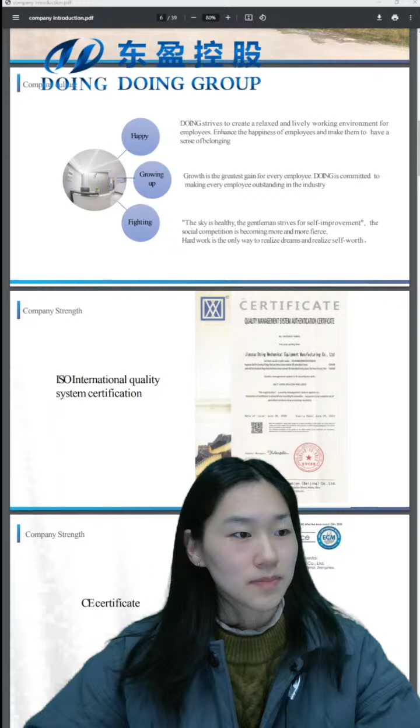Our company culture is happy, growing up, fighting. Happy means everyone is happy in Doing company. Growing up means our company hopes everyone can improve in this company, and everyone will improve their capacity. Fighting means we have a strong spirit and work hard to realize our dreams and self-worth.

Okay, there are our certificates to support our company. The first one is the ISO International Quality System Certification. You can see this is our company name, called Doing Mechanical Equipment Company. And this is the CE certificate. This certificate means our company meets the requirements of the EU.

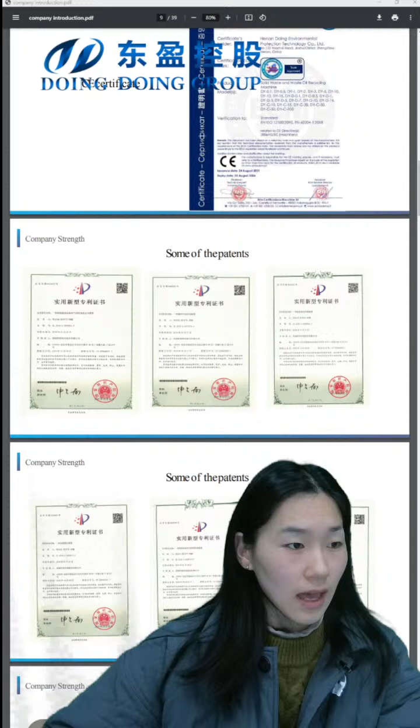And there are our patents. You can see this one is for the tire pyrolysis machine safety device, and this is for the oil gas cannot-backward device. This patent is for the discharging device, for carbon black discharging.

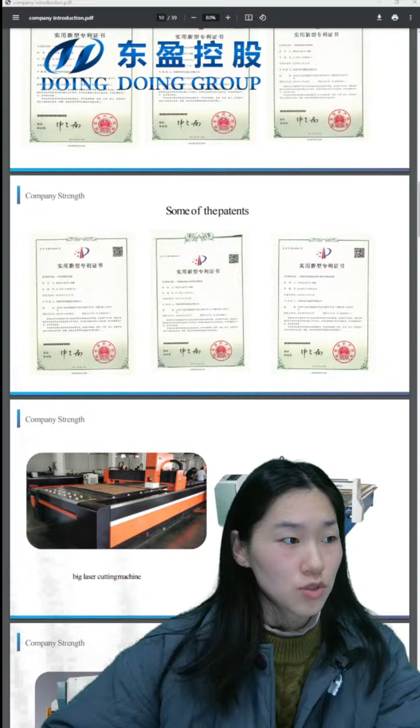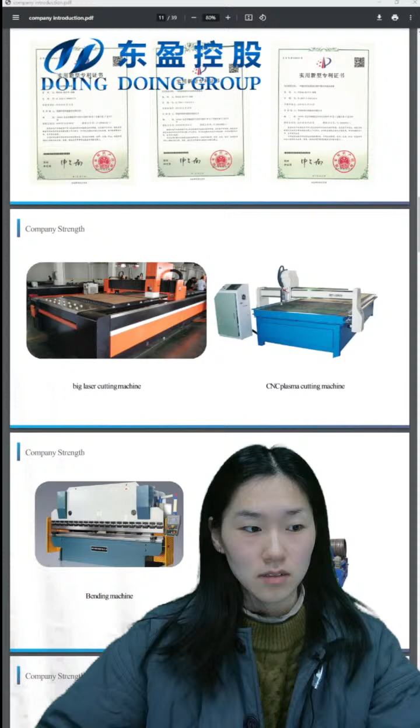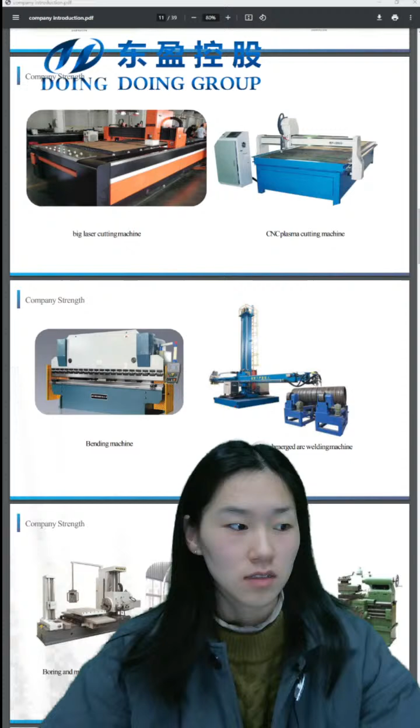There are our machineries. You can see this big laser cutting machine to cut the thinner steel plate, and this CNC plasma cutting machine to cut thicker steel plate. This bending machine bends the steel plate to make the whole reactor, the pyrolysis reactor. This is an automatic submerged arc welding machine to weld the reactor.

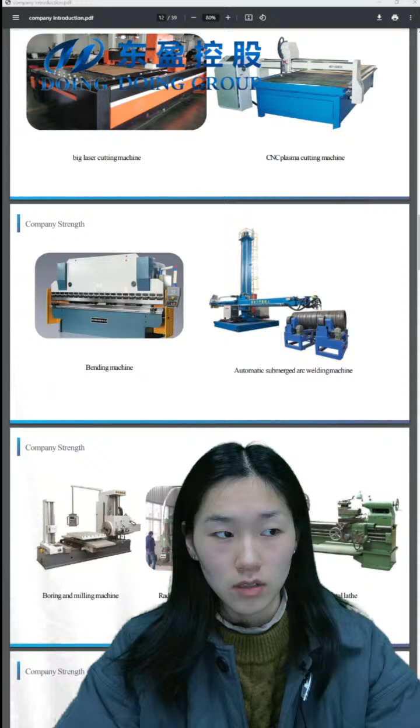Some suppliers make the reactor using workers manually, so their welding seams are not strong and easily corrode. So if you want to buy a pyrolysis machine to start this business, you can learn about the welding machine and the welding process from different suppliers.

This is a boring and milling machine, drilling machine, horizontal lathe, and the floor lathe, shaper, and rolling machine.

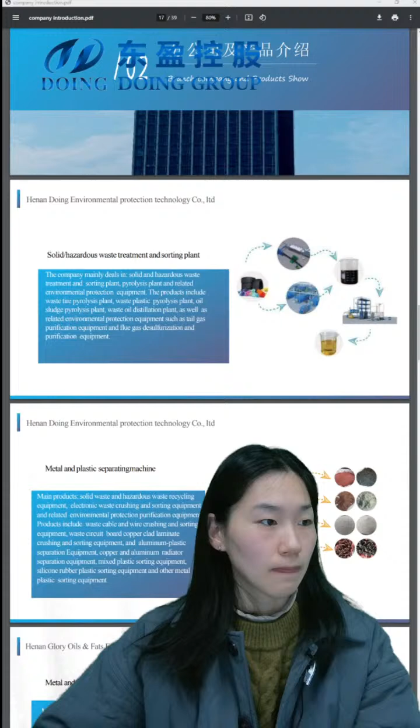This is our pyrolysis machine. You can use tire or plastic, feeding these raw materials into the pyrolysis machine and heating the reactor. The raw materials will be converted into oil gas, high temperature oil gas, and the oil gas will go through the condensers. We have 4 stages of condensers. Going through the condensers, the oil gas will be cooled down into liquid oil. You can see this liquid oil.

If your raw material is tire, the liquid oil will be more black. If your material is plastic, the color of the oil will be cleaner than tire oil. If you want to get diesel, you can choose a distillation machine to purify the pyrolysis oil into diesel. You know the price of diesel is more than pyrolysis oil.

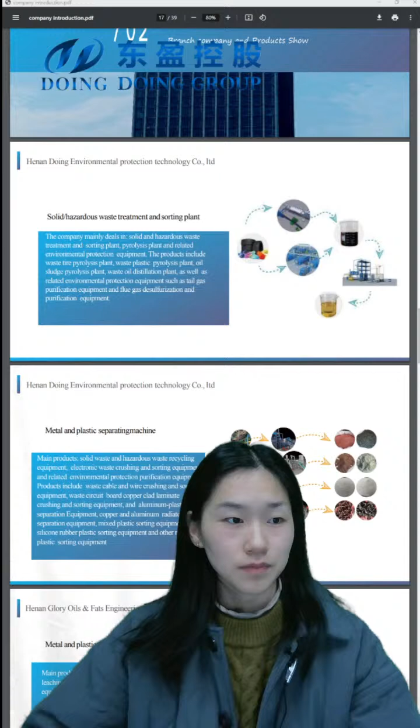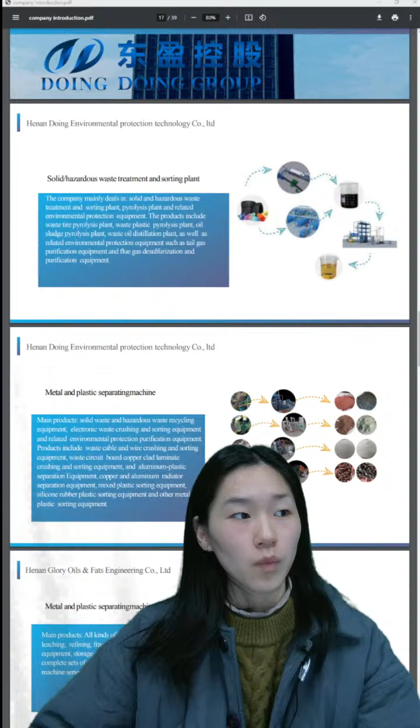This machine is called a solid waste treatment machine. And this is the other department, metal and plastic separating machine, just like with cable and electric wire. If you want to process this electric waste, you can choose this machine.

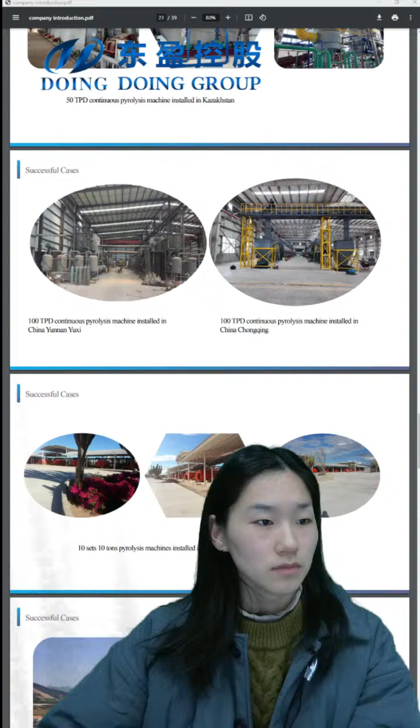This project is for a 100 TPD pyrolysis machine, installed in China, Yunnan, Yuxi. This is also continuous. Okay, we finished these parts.

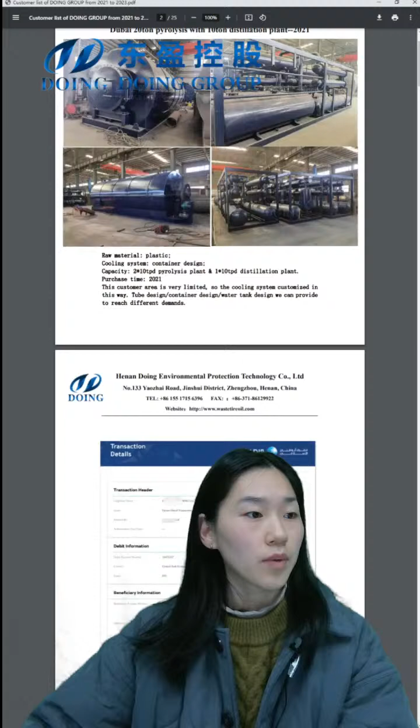Now I will introduce our project cases from 2021 to 2023.

This is the first case, from our Dubai customer. Their raw material is plastic. You can see the cooling system. They chose a container design. Container design means you can put this machine, the whole system, into a

40-foot high container. You can see this design is a frame. You can put this frame into the container directly, it's enough.

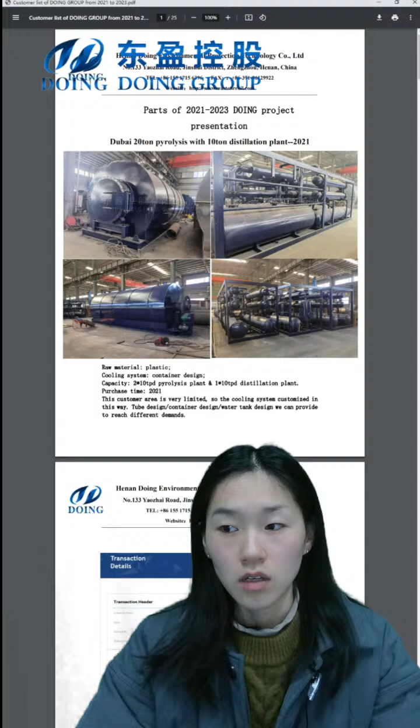The capacity is a 10 TPD pyrolysis machine. This machine is the batch type. Our batch type machines have many capacities, between 100 kg to 15 tons per day.

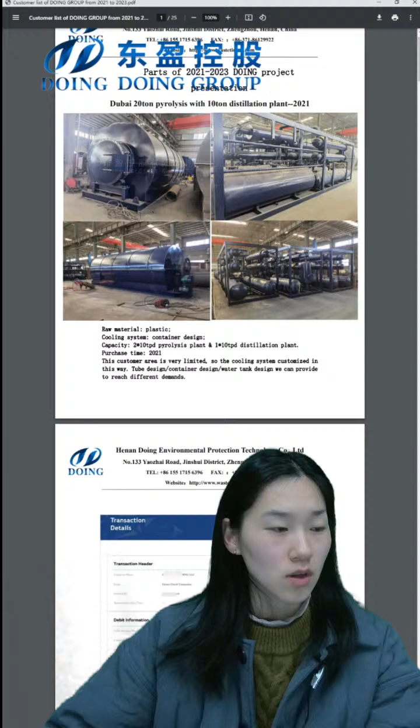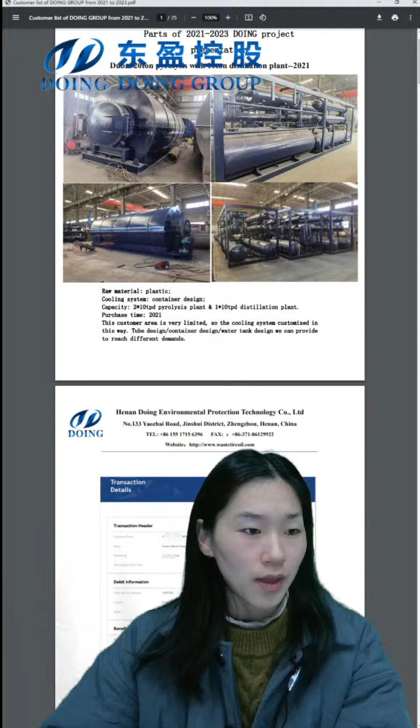The order was placed in 2021. This customer's area is very limited, so the cooling system was customized in this way, tube design, container design. It's very easy to install and operate. If you have any requirements, we can customize to reach different demands.

Okay, this is the transaction details. The customer's payment to us.

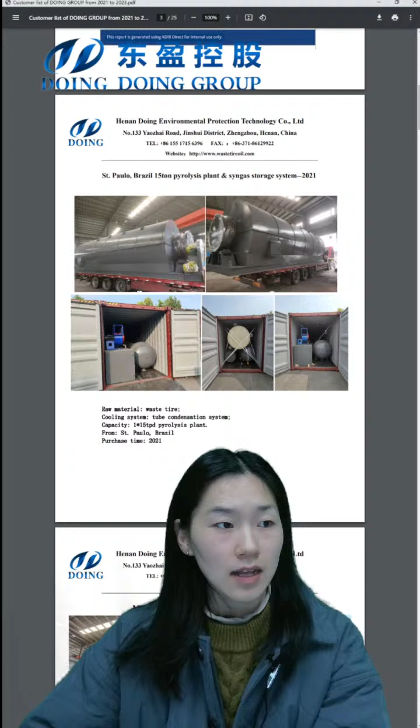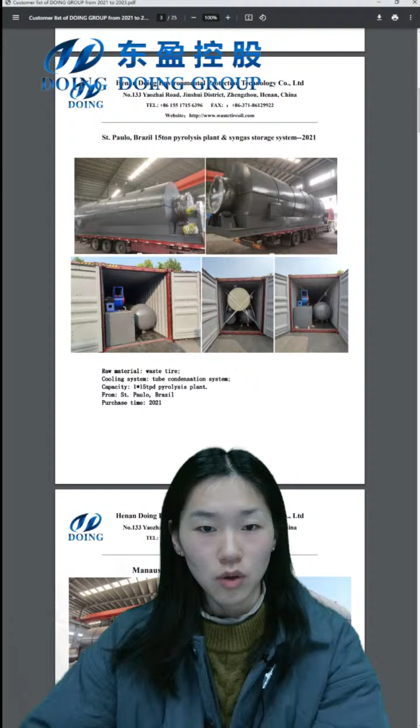These are delivery photos at that time. These photos are at the seaport. We loaded the machines into containers and took these photos just for checking the delivery details, to ensure no problems happened.

Okay, this case is also installed in Brazil, Manaus, in 2021. This customer's raw material is also waste tire. The customers who process waste tire are more numerous than the customers who process waste plastic, because the amount of waste tire is more than plastic.

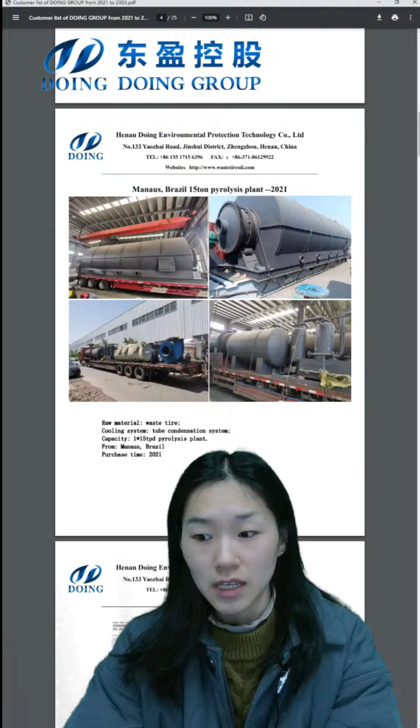The oil yield of waste tire is around 45% to 50%. But for waste plastic, we can't give a specific number, because there are so many types of plastic. If your raw material is PP, PE, PS plastics, the oil yield will be more. But PET and PVC are not suitable for pyrolysis, so try your best to reduce the content of PET and PVC.

You can see their cooling system is a tube condensation system. The tubular condensers are our new design. There is also a cooling design called a cooling water tank - it's an old design in the market. The water tank means there are so many tubes in one water tank, and the oil gas goes

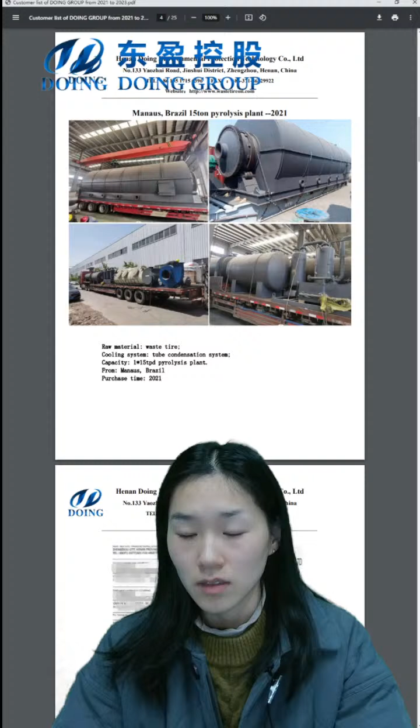through this water tank, so all the oil will be collected into one same oil tank - you will get one same quality oil. But with our tubular condensers, in the whole system we have 4 steps of cooling condensers. For these 4 steps of cooling condensers, we match 3 oil tanks to collect different qualities of oil. You can sell the different quality oils separately and get different profit. This is a bill of lading.

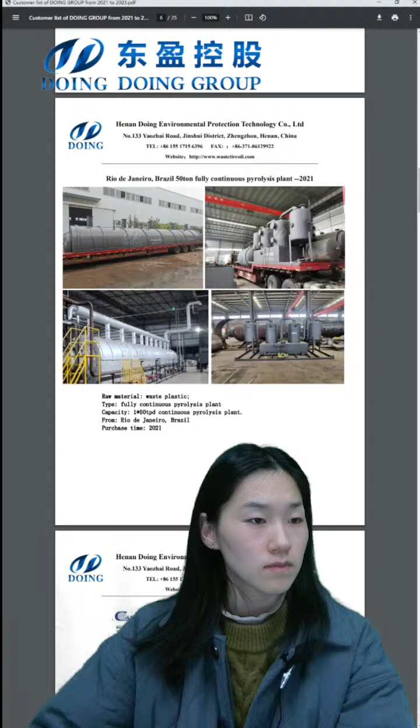You can see this project is also installed in Brazil, but it's not a batch type one - it's a 50 TPD fully continuous type.

This is an insulation cover to save energy and ensure the heat reaches the reactor fully. This is a smell removal system.

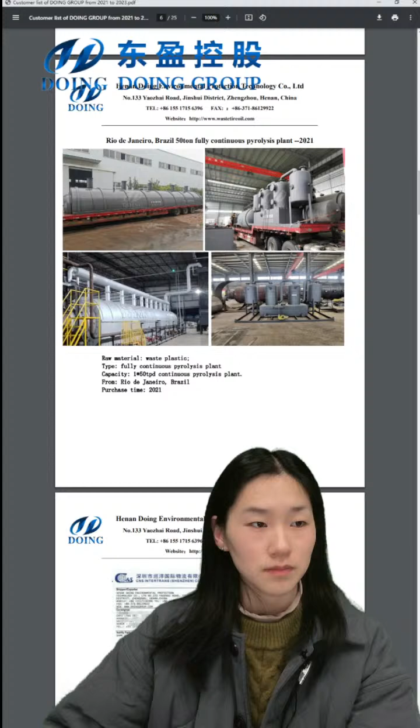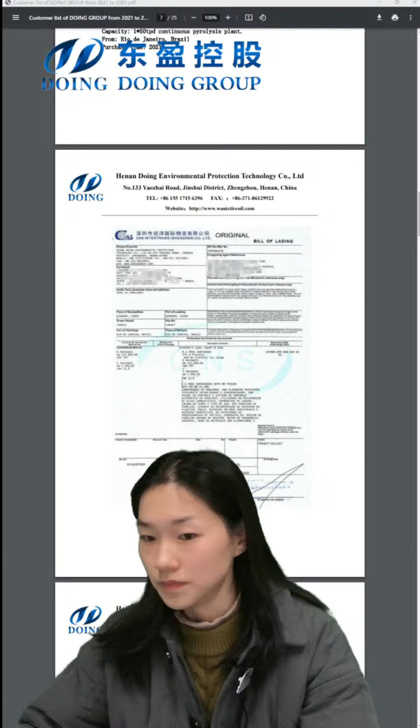This customer's raw material - okay, this is the original bill of lading for your reference.

For this customer, he bought a 100 kg minimum pyrolysis machine for testing their plastic raw materials, and after half a year, they bought a fully continuous, the biggest pyrolysis machine from us. It means using the smallest machine to test was a success. We have many customers who choose the smallest machine to test their raw material, to make a pyrolysis project successful before they start a big business.

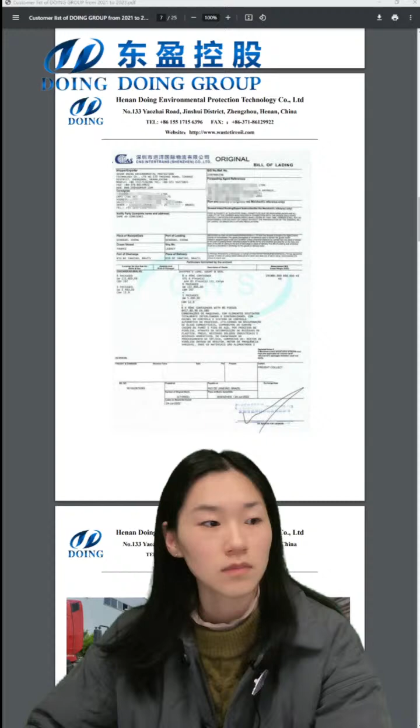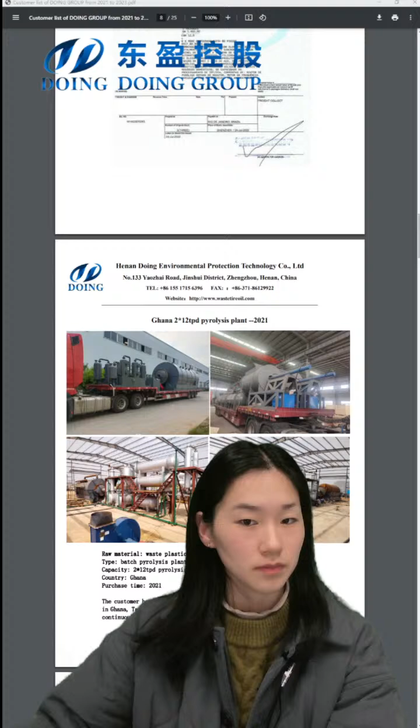Okay, this case's raw material is waste plastic and tire. The type is also batch type machine. In Africa, we suggest the batch type for customers here, not the continuous type, because in Africa the labor cost is not very high, so we don't need to save labor cost with a continuous machine. For batch type, you just need 1 to 4 workers per shift, and 2 to 3 shifts is enough.

And in Africa, the smoke environmental requirements are not very strict, so the batch type is enough.

There is a small story for this customer. This customer has purchased equipment from us 4 times, respectively in Ghana, Tanzania, Togo, and Senegal. There are plans to install a fully continuous pyrolysis plant around Dubai in the future, so I trust they will learn more about the fully continuous machine and discuss the technical details with us in the future. I hope the new project will be held successfully.

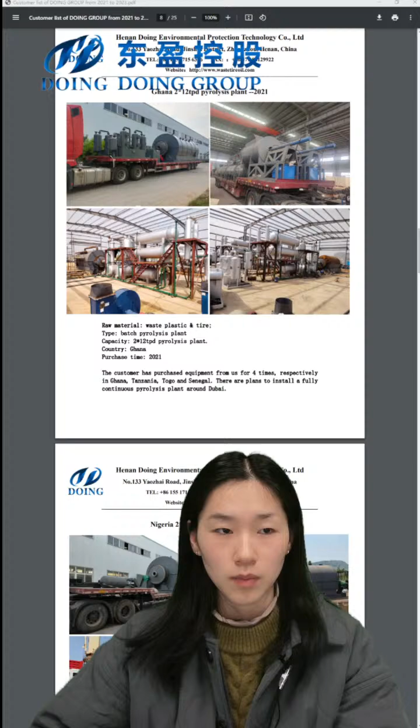Okay, this project in Nigeria, there are two units of 15 TPD pyrolysis plants in 2021. The raw material is waste tire, also batch type plant.

I want to show you, we have a branch office in Nigeria, and this branch office is specialized for cassava machine and potato starch machine. If you are in Nigeria, you can contact us and also can visit our branch office in Nigeria.

Yeah, so this picture is from installation at that time. They also use our new design, the tubular condensers. You can see these are our horizontal condensers. The horizontal condenser has the biggest cooling area to ensure the oil gas will be cooled down fully.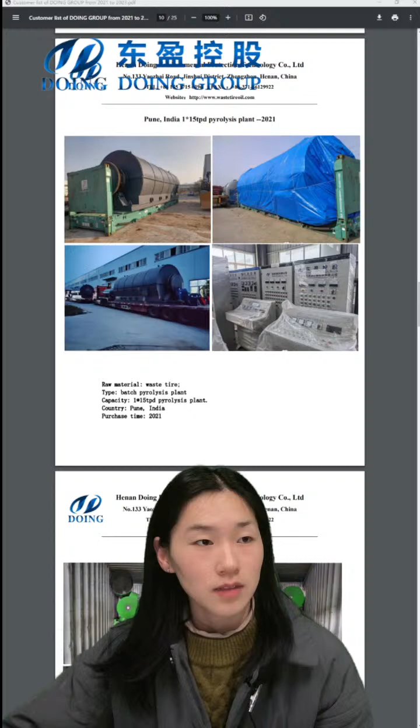This project is in India, Pune city. You can see this is a 15 TPD batch type machine in 2021. These photos were taken at the seaport at delivery time. This is the electric cabinet, our company logo.

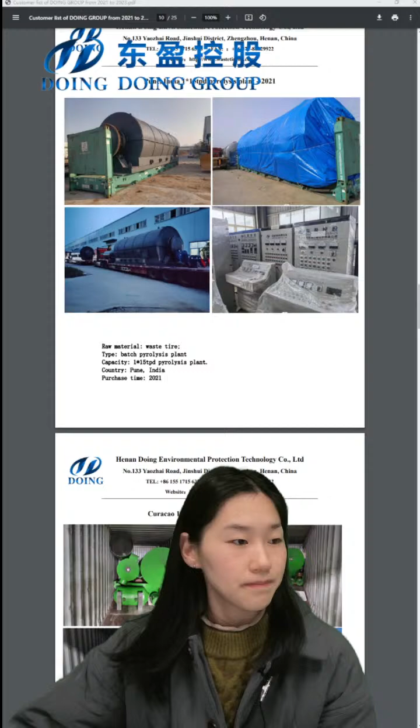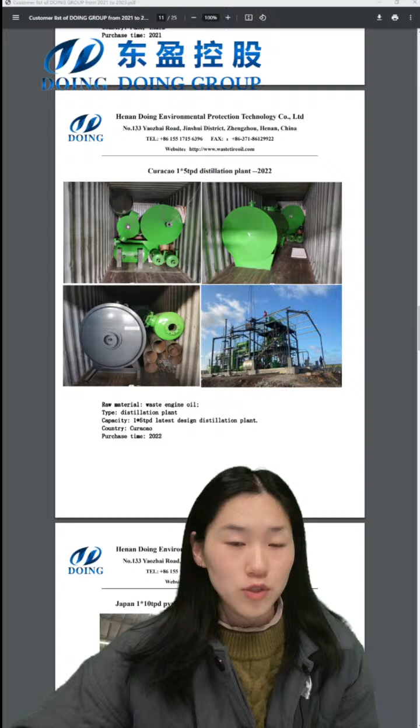This project was delivered in 2022. It's a 5 TPD distillation machine. The 5 TPD is not very large, but it's very popular in the new pyrolysis industry. If customers want to start this pyrolysis machine, but also want it to bring a good profit, they will choose a middle capacity like this one, 5 tons per day, to start this project.

This photo is for the installation at the customer's factory. This is the oil tank.

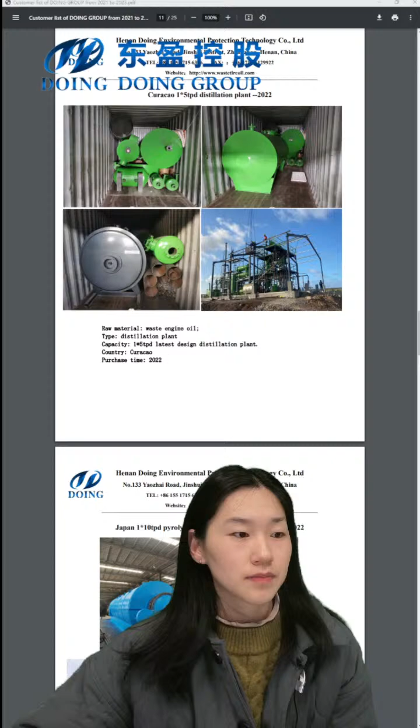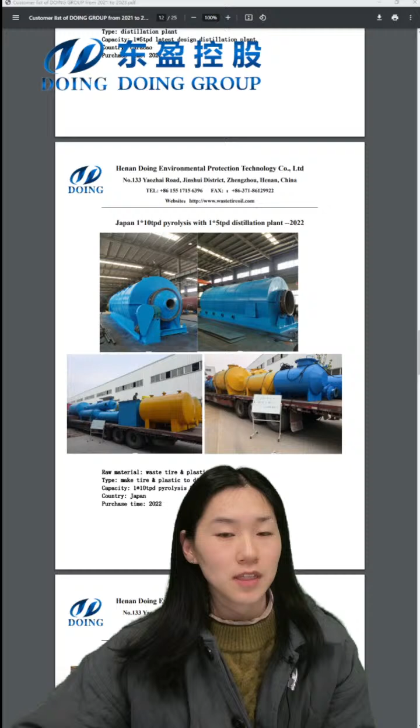This 10 TPD machine we sold to Japan. It's a 5 TPD distillation plant.

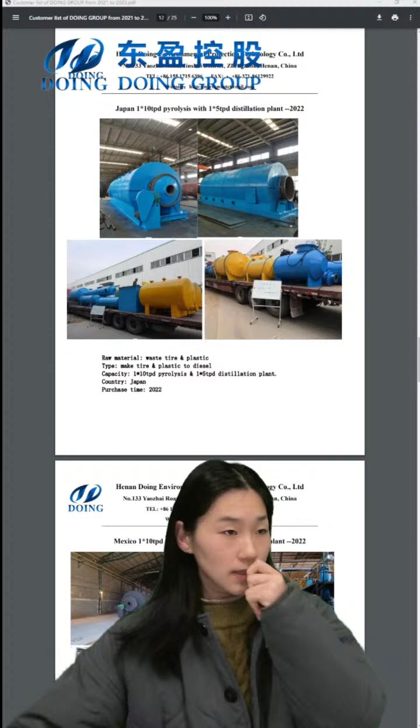You can see this reactor is for a 10 TPD machine, and there are the spare parts like condensers, oil tank, and our optional systems like a vacuum system and the rapid cooling system.

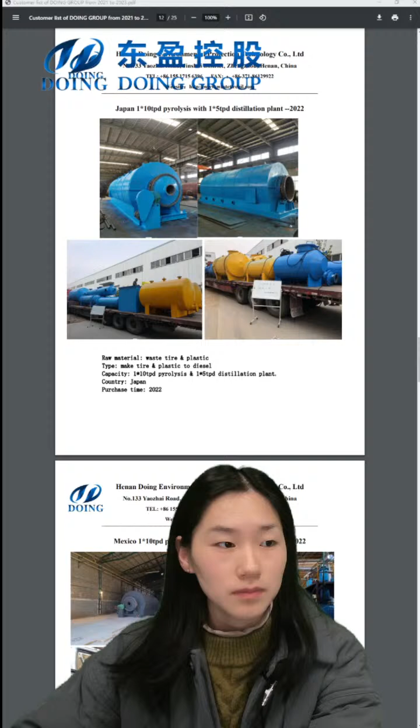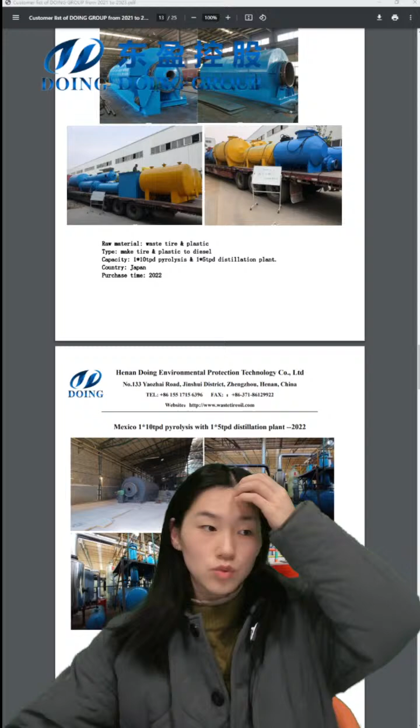This project was installed in 2022, also in Mexico. You know, Mexico is our main market all over the world. This case is a 10 TPD pyrolysis machine with a 5 TPD distillation machine.

This customer's raw materials are waste tire and waste plastic. Why do customers want to choose these two raw materials? Because the price of raw materials changes all the time. When the price of waste tire is not too high, the customer can buy the waste tire and process this low cost material to get a good profit. But when the cost of tire is very high, they can choose plastic.

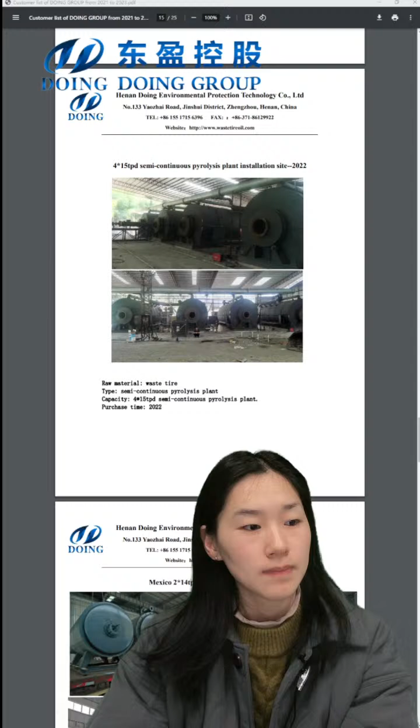This machine type is a semi-continuous pyrolysis machine. We sold 4 units of 15 TPD machines in 2022. Their raw material is also waste tire.

Before we had batch type and continuous machines, but nowadays we designed the semi-continuous type. For a semi-continuous machine, you don't need to open the discharging door to discharge carbon black.

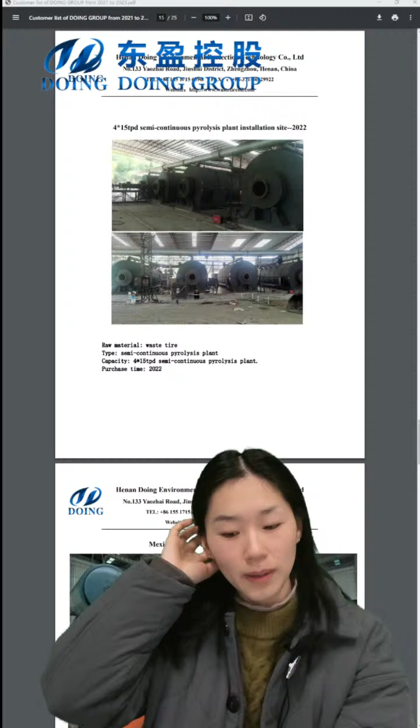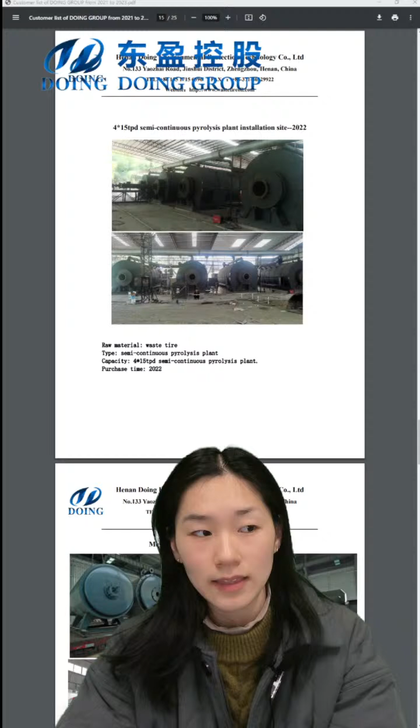For semi-continuous, you can improve production efficiency. You can finish 3 batches within 2 days, but for batch type, you can finish only 1 batch per day. So semi-continuous is more efficient than batch type, and cleaner, with higher efficiency.

This project is installed in Mexico. There are 2 14 TPD distillation machines. This customer's material is waste engine oil. The quality of waste engine oil is very high, so the quality of the final diesel is even better.

These tanks are the rapid heating system. It's an optional system to reduce the heating time.

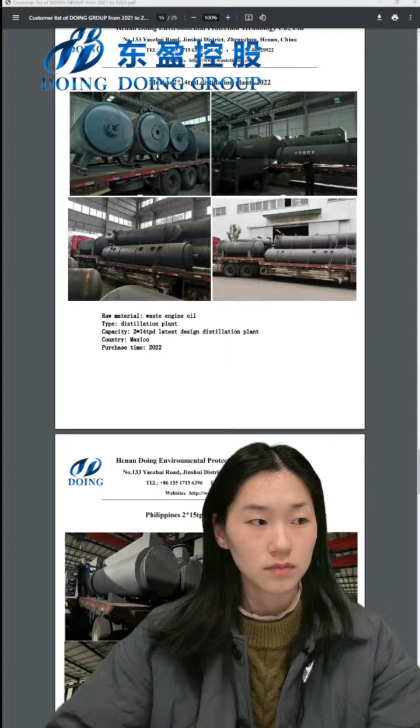This project is in the Philippines in 2023. This customer bought 2 units of 15 TPD pyrolysis machines. They use waste tire as raw material, and you can see they chose to use a cooling water tank to cool down the oil gas.

A water tank is a simple cooling device. It doesn't require very high skill from workers. If you don't have mature workers to operate your machine, you can consider this water tank design, and the cost of the water tank design is lower than our new tubular condensers.

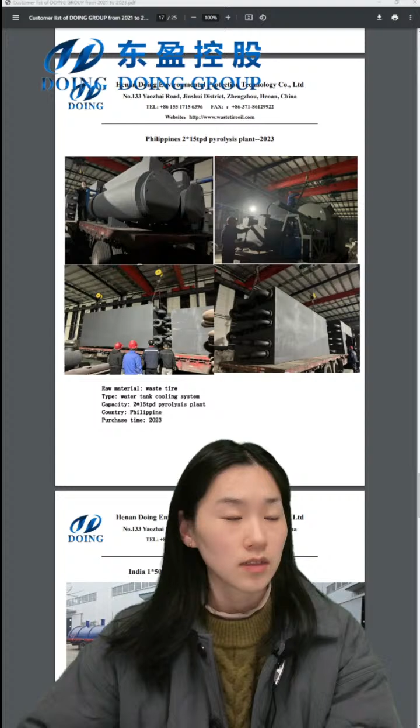Before we deliver the machine, they made the on-ground base to install the continuous reactor. For a continuous reactor, we need to ensure the stability of the whole system. So when making the ground base, you need to make a very strong base to ensure the stability of the whole system.

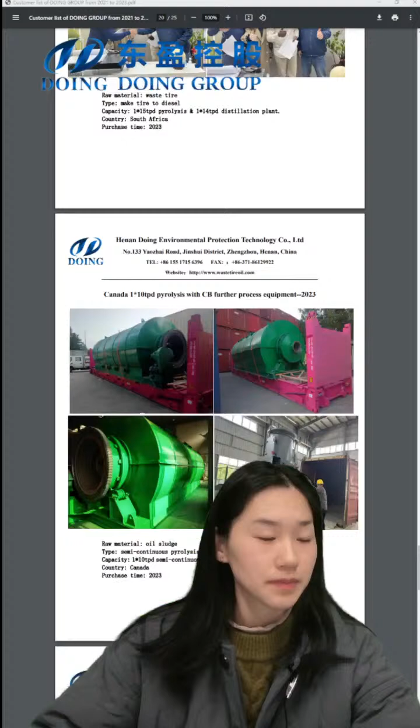Okay, this 10 TPD machine is for processing oil sludge. For oil sludge, a part of customers choose this material because, like normal customers, they usually collect tire and plastic easily, but for oil sludge you need to find a fixed origin. You need to find a specific seller of oil sludge. When you have this long time cooperation, the oil sludge will be a very good raw material.

And we have a customer who uses the waste oil from ships. They use our specialized oil sludge machine, and then they get good quality final oil.

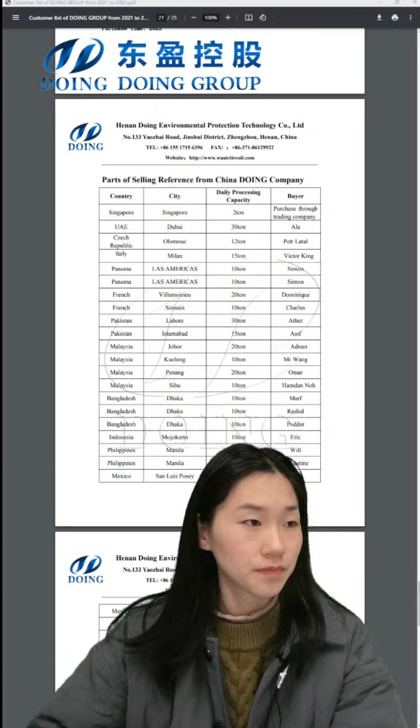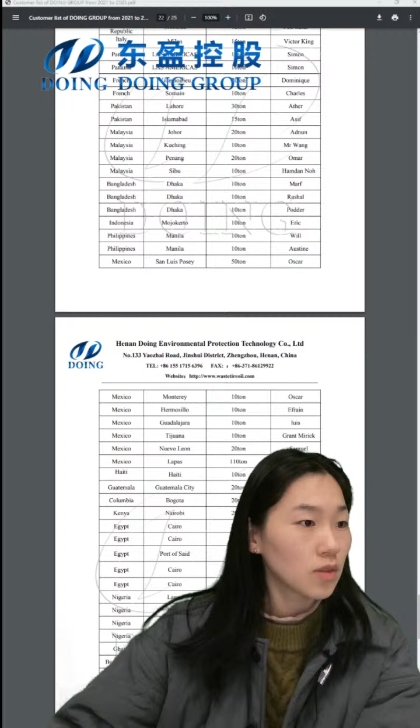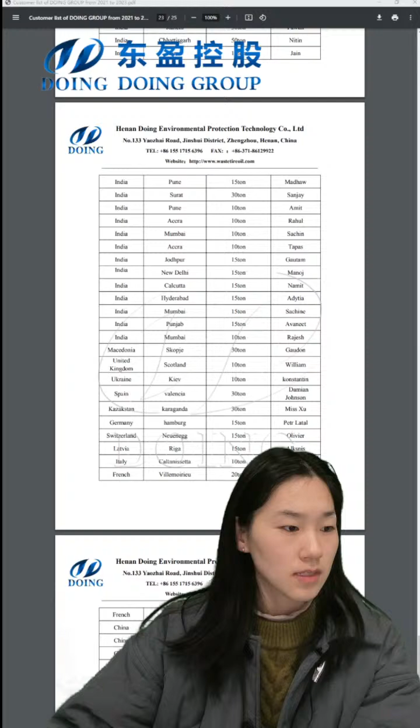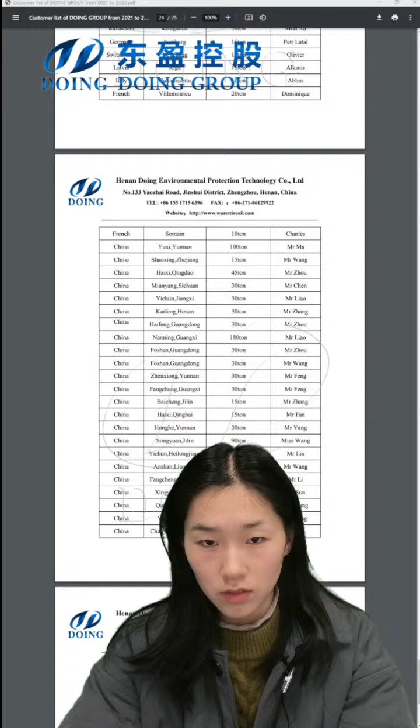Okay, this is a part of selling references from our company. Singapore, UAE, France, Malaysia, Bangladesh, Indonesia, Mexico, Nigeria, India, Spain, Germany, Italy, France, and this part is the project in China. In China, we have many batch type factories. For continuous, we have 3 to 4 factories.

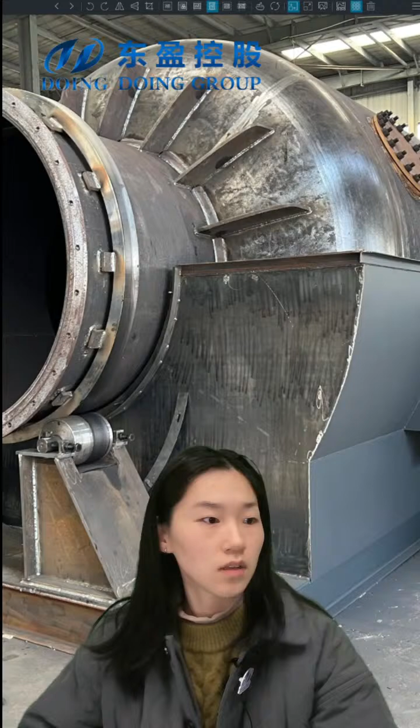Okay, let's see some pictures from our factory. This is a finished reactor. We put the reactor into the insulation cover to integrate a whole system. You can see for the reactor we make the reinforcements to strengthen the connection between the furnace body, reactor body, and the feeding small cylinder.

It not only has the reinforced ribs outside, but also has these ribs inside the reactor. So the connection is very strong.

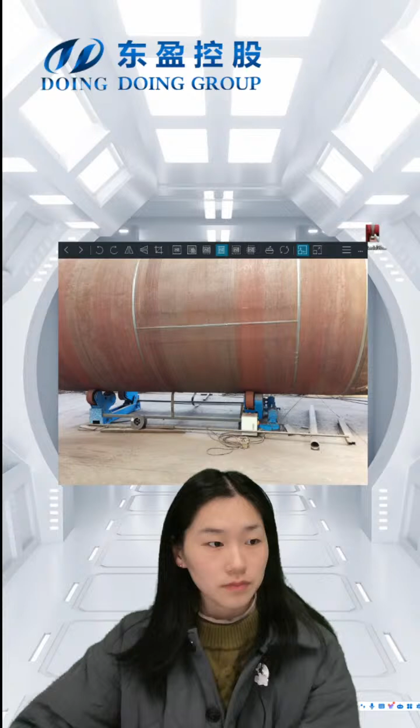This picture shows the welding seam of our reactor. The width of the welding seam is 2.5 times the steel plate thickness. So the welding seam is very strong to ensure the reactor does not leak, and ensure the quality of the whole system.

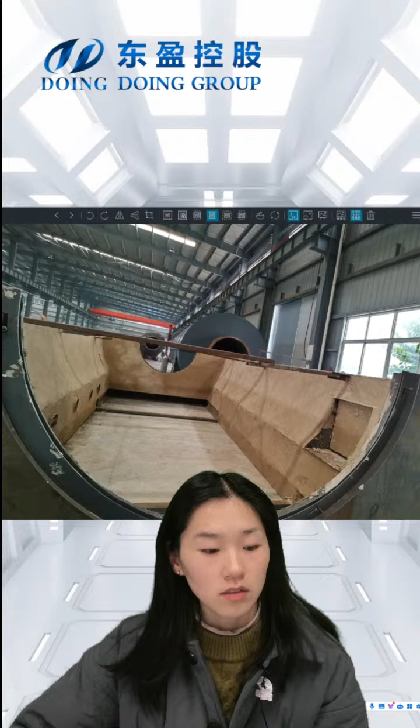This is our insulation cover. The thickness of it is 12 centimeters. It has a strong insulation effect to save the heating fuel.

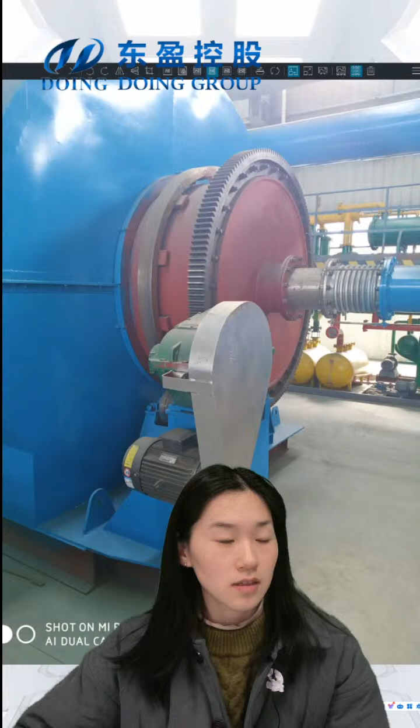Okay, this is a reactor motor. This is our rapid cooling system to make the cooling time of the reactor quicker.